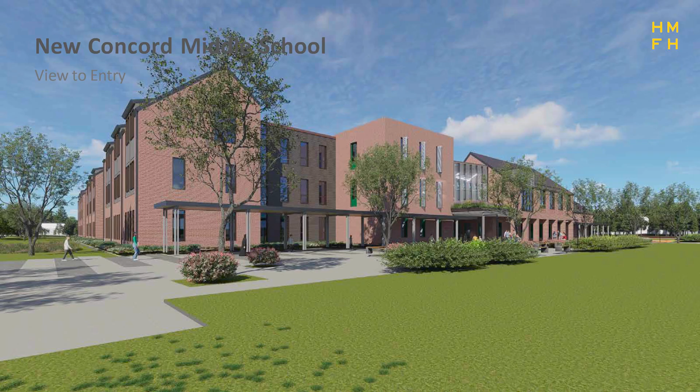This is the agenda for this evening, which I think Tim just went over. This is a view to the entry of the new school. The new school is going to be built to the west of the existing school, basically on the location of...

The existing athletic fields. The building is being designed to be net zero, which means it's going to produce as much energy as it uses. It has solar panels on the roof and geothermal well fields on the back side of the building.

The building is predominantly 2 stories. There is a 3-story wing, which is the academic wing, which faces south.

This is a view from the new athletic fields, looking back towards the entry of the school. The academic portions are on the left. There are some administrative offices and student support spaces in the middle. You can see the glassy piece in the middle is the entrance.

There's one main entrance for the school, so students arriving in a car or in a bus all will come to this one single point of entry. And the media center you can see is on the right side.

This is a view from the north side of the site, looking into the cafeteria courtyard. On the left side are music spaces and the theater, and on the right side is art classrooms and the gymnasium. You can also see in the foreground, this is the media center as well.

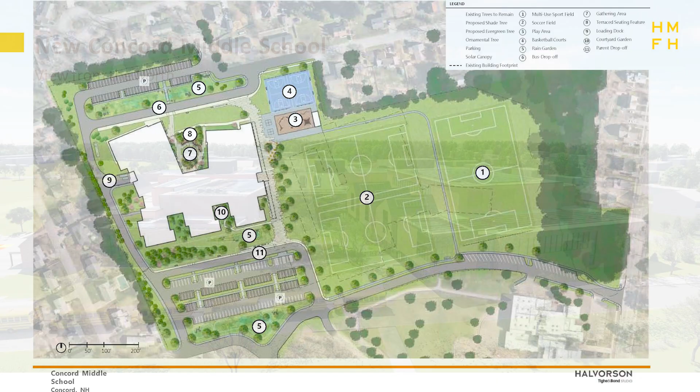This is a site plan. You can see dashed in the middle, there is... can you see my cursor moving? Number 2 in the middle of the site, that is the footprint of the existing school. So the new school is being built to the west.

The existing driveway that separates Abbott Downing from Rundlett School remains roughly in the same location. That is the parent drop-off, and the main parking lot is accessed from that parent drop-off. Students get dropped off at number 11 and proceed to the entry, which is sort of in the middle of the building on the east side.

There's a secondary parking lot to the north, which is primarily for faculty. And item number 6 is the bus drop-off. There is a service road around the west side of the building that will be gated to prohibit access, and the gate will only be open for deliveries or emergencies.

We have a short animation. This is coming up the entry drive looking towards the entrance of the school. In the foreground here, you'll see the parking area. There is potentially some solar parking canopies.

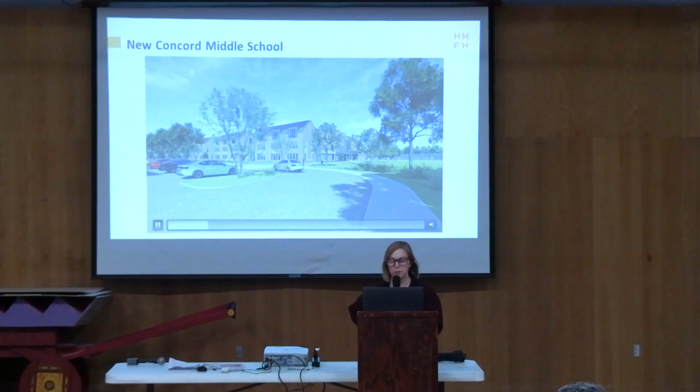What you're seeing there to the left, those are the 3 academic wings that are 3 stories. So that's the 3-story part of the building. Now we're swinging around towards the entrance. There's a covered walkway that brings you to the one single entrance. What you see on the left there are kind of student support spaces, counselors' offices, nurses' suites.

Sorry, this is glitching a little bit. We're swinging around and looking at the main entry, which is the glassy piece in the center with the canopy above it, and then to the right is the media center. And on the far right is the band room.

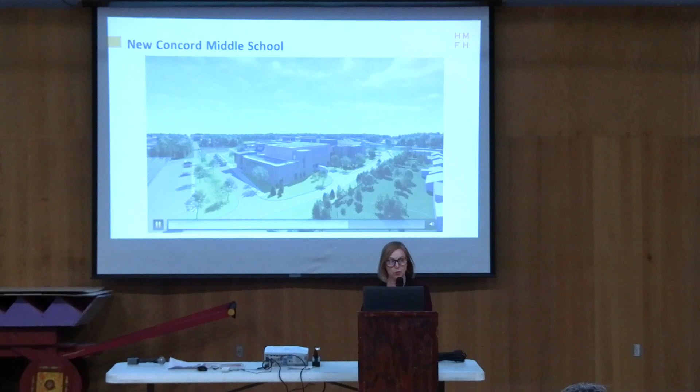Now we're swinging around to the north. It's a little slow here. To the north, there is a courtyard outside of the cafeteria. Music spaces are to the left, arts to the right. And then the gymnasium is on the 2nd floor above the loading dock.

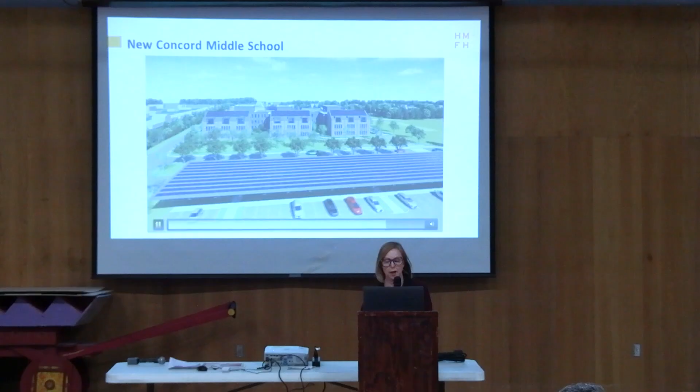This is the service drive and the loading area. Now we're swinging back to the 3 academic blocks. The building is predominantly brick with a metal roof, and we do have some accents with brick patterning and a couple different colors of brick to give it a little life.

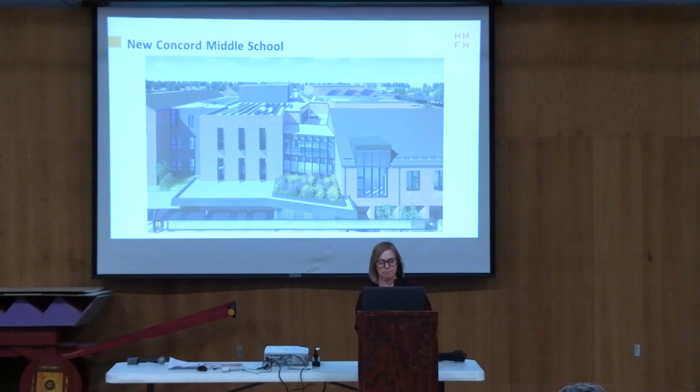Now we're dropping it back down to the main entrance. And that's all I have. I'm going to hand it over to Harvey Construction to talk about construction traffic and schedule.

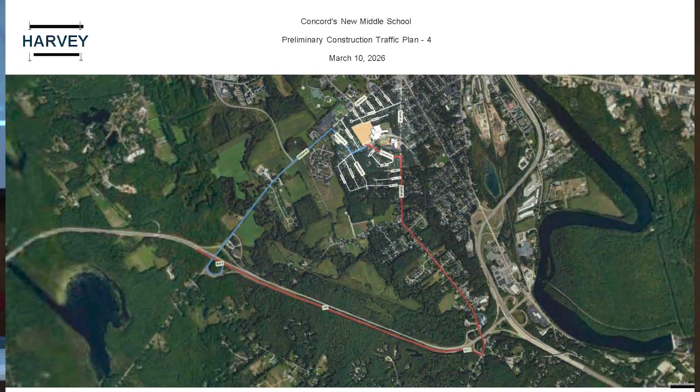I don't have any fancy movies or anything, they're really just simple graphics. What we're going to talk about is the anticipated construction schedule, short-term and long-term, and then traffic patterns while we're under construction. On your handouts, you saw some milestone dates relative to construction.

The first 4 dates represent references to mobilization. April 27th is the target right now. That means we'll be on site. That doesn't mean that's when the bulldozers show up, but it means we're present here, putting up construction fence and preparing the property.

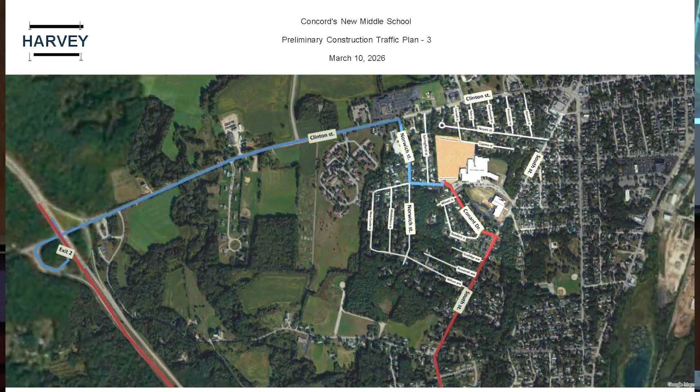There are some activities such as ground improvements, if you've been following this project. The soils need to be improved. You do that by ramming aggregate stone into the ground to make it better. That is going to take upwards of 12 weeks, and that's part of the initial process here over the summer.

Then in earnest, by the fall, we're going to start seeing heavy machinery relative to the construction. The new building is going to go until November of '28, just over 2 years, at which point the school would open and we would then come over here to take this building down to build the fields.

Then we would build the fields through '29, and since they're grass and not synthetic, they need a year of growth, mowing, and maintenance before they can be played on. So that puts you up to about 2030 for them to be available. The other dates on the bottom are activity date driven, so they have a start and a stop, and they tie up to the 4 dates I just read off to you.

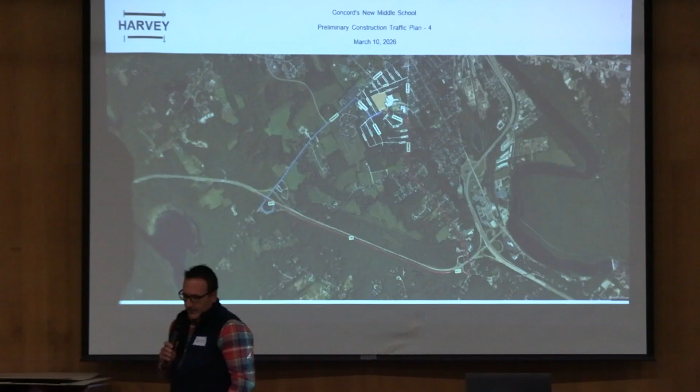We looked at traffic patterns, in particular the tight roads in the neighborhood, and chose 2 different routes to come in. This gives you a good view of 93 and 89 and exit 1 and exit 2, which would mostly be utilized. Here's exit 1, here's exit 2, Clinton Street, coming in along those major thoroughfares to get to either Conant off of South or Norwich off of Clinton.

That would bring us into the construction site, where the construction entrance is actually going to be just over here to the right, at the base of the fields along the entrance drive. Zooming in at exit 2, you can see Clinton Street a little clearer, coming down Clinton, down to Norwich into Conant, and you can see where the blue and red lines emerge.

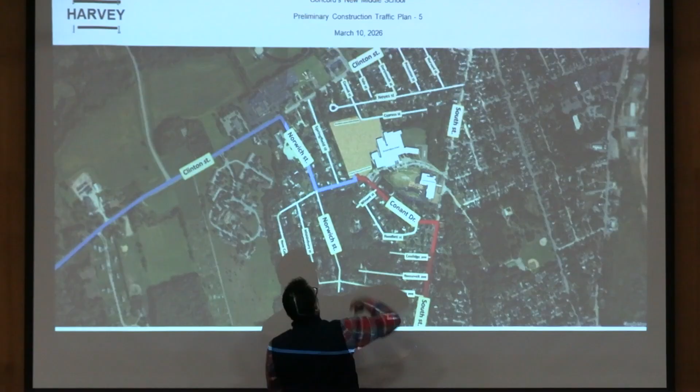This is showing exit 1, and now there's a little blow up of the area. So we are sitting essentially right there, and the entrance is going to be just off here to the right, off of Conant.

This is not going to be all day, every day. This is really major traffic relative to deliveries. Construction workers obviously take smaller vehicles, and they'll be finding their way, with most if not all of that parking happening within the confines of the construction site, so we won't have street parking associated with worker parking. This is really a truck route, delivery route, for large vehicles to support the construction process.

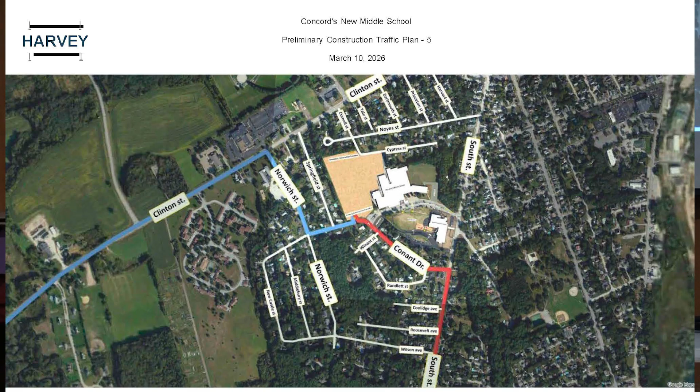We're going to have questions later, I'm sure, but this is now going to move into the design portion, the build conditions. So this was the construction portion, the sequencing, and next is about traffic relative to the build condition, which is with GPI.

All right, good evening everyone. You weren't kidding, that is sensitive. My name is Rebecca Brown. I'm here from GPI, the traffic consultants on the project.

I want to walk you through a little bit of the existing and proposed circulation that will happen with parent traffic and bus traffic coming through the school site, and talk about some of the improvements that will occur in order to make those traffic patterns work. Then we're going to open it up to hear some of your questions and comments.

For anyone who has been out here, as part of the neighborhood and as abutters, the majority of you are already aware of the existing traffic patterns. But if you see on the figure behind me, the blue arrows traveling through the site today represent where the existing parents travel through the site.

Right now, it's a bit of a free-for-all in the morning. Parents come in through the main driveway from South Street, and they also come in through the Abbott Downing driveway. They'll pull up really anywhere they can, stop in the middle of the roadway to let their kid hop out, and then go back out onto Conant Drive.

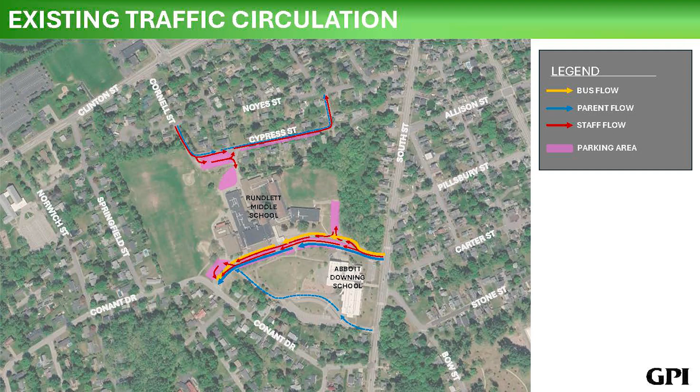Into the school property through South Street and then coming back out onto Conant Drive to exit. The buses do also enter into that same driveway from South Street, and there is a median that runs down the middle of the driveway that separates the bus traffic from the parent traffic. The staff, unfortunately, have to mix in with both the bus traffic and the parent traffic right now. So in the future, one of the main goals was to try and separate all of this traffic to make it flow a little bit better so that staff trying to get into school in the morning aren't getting mixed in with the parent traffic. The buses can operate efficiently, also not getting mixed in with the parent traffic.

So in the future with the proposed school, both the staff and the parent traffic will enter through the main driveway from South Street. But the parents will go from there into their own separate parent drop-off loop, right in front of the school, where they will drop off their student and then be able to pull out into a separate driveway onto Conant Drive.

Whoops. Not sure what happened, but the screen just went black on me.

There we go. The bus traffic, on the other hand, will come in through Noyes Street onto Cornell Street and loop in through their own separate drop-off area in the back of the school, and then come back out onto Cypress Street through Noyes Street to get back to South Street.

Now, one of the reasons this circulation pattern was chosen, and I know there's been some concerns about that being a lot of bus traffic in the neighborhood, can we flip that around? But with the school being located so far back from South Street, this option really allows us to maximize the distance between the school and South Street for that parent traffic to queue up. And it keeps all that parent traffic out of the neighborhood where there's less control of which roads the parents will take.

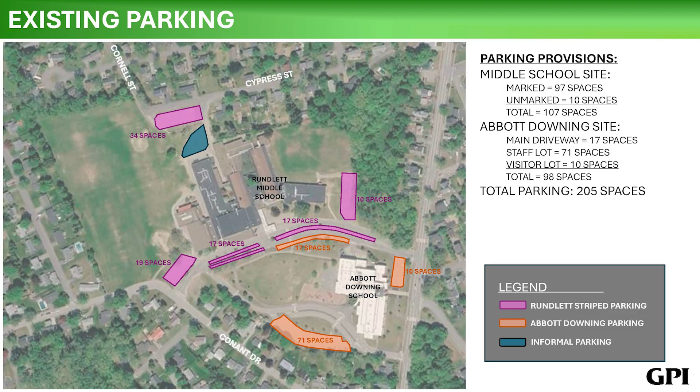So just to quickly cover the parking that is proposed, as you can see from this graphic, there's kind of parking all over the place right now with the existing layout of the school. It runs along both sides of the driveway, so if vehicles are parked in there in the afternoon when people are getting out of school, they're really trapped in there behind the queued traffic until that clears out after school. In the future, there will be two separate parking areas.

One will be located on the north side of the building and have 60 parking spaces dedicated to staff only, so there won't be visitors coming and going through the neighborhood throughout the day. That parking will be dedicated to staff and assigned to specific staff. There will also be a large parking lot on the south side of the building, on the inside of that parent drop-off loop, where visitor parking and additional staff parking will occur, so that visitors coming to the school are coming in through that main driveway where there will be signage directing them on where to go, and it won't put that traffic into the neighborhood.

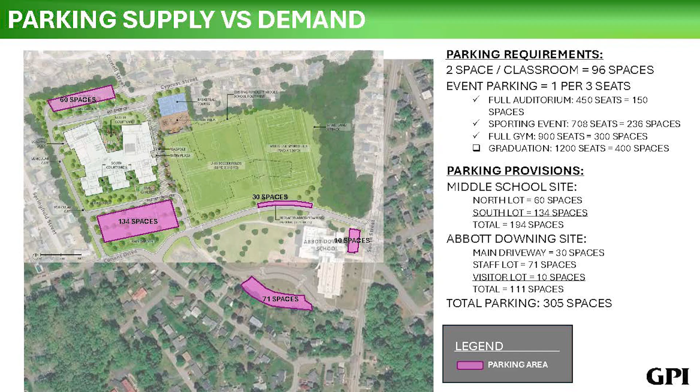Right now there are 19 buses that all queue up in that main drive aisle. There is just barely enough for all 19 of those buses to fit in that area. Once that 19th bus pulls in, they start blocking parents from being able to get into the parent queue. Parents will park double stacked all along the driveway where there's parking already located on both sides. It becomes a stocked area where they're all waiting for students to come out of the school. Because of that double stacking, rather than having a rolling pickup situation, if a certain student takes a little bit longer to get out to the car, everyone behind them is waiting in that line until that student finally gets in their car and that parent can pull away.

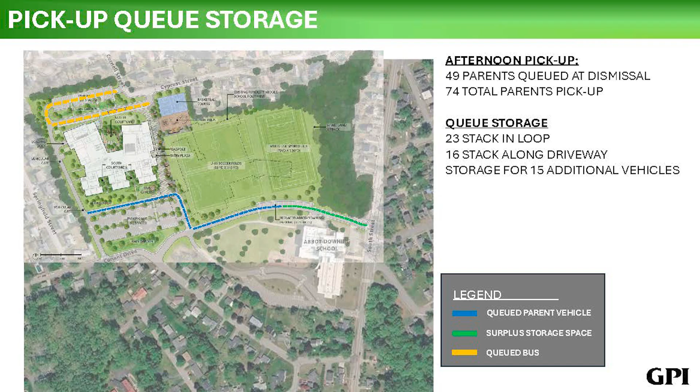With this, it really doesn't matter what time a parent gets to the school. It takes away that encouragement for people to be the first car in line so they can get out of there quickly, because they'll have the opportunity to bypass the line rather than sitting there waiting.

So we are proposing to upgrade those school zones with new school zone flasher assemblies that will light up with the speed the driver is going. Once a driver starts going 5 miles an hour or over the speed limit, it will just say slow down.

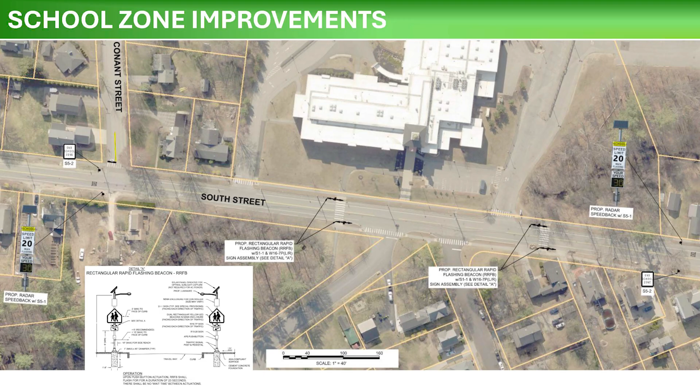We're also proposing to install rectangular rapid flashing beacons at the 2 main crosswalks on South Street on either side of the site driveway. Once a pedestrian walks up, they press a button, it starts flashing a signal back and forth to alert drivers that there is a pedestrian waiting to cross. That also helps to facilitate crossing guards, so a crossing guard can activate that button before they step out into the roadway with their placard, as an added benefit and safety measure for those crossing guards as well.

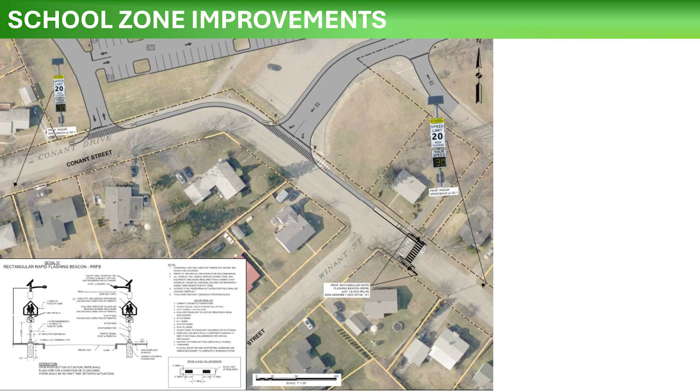This is showing similar improvements over on Conant Drive, where we've proposed radar school zone feedback signs, and upgrading the existing crosswalk located just east of Winant Street, since there are currently no curb ramps there. We're adding curb ramps to make it ADA accessible, and installing RRFBs to alert drivers that there are pedestrians crossing the roadway.

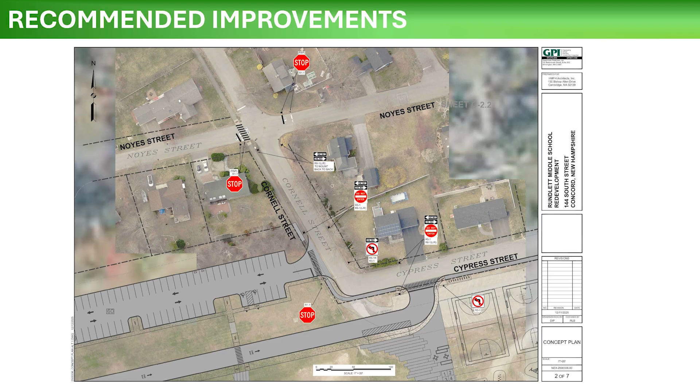There are also some minor recommendations over on Cornell Street and Cypress Street, mainly signage related, to reinforce the one-way pattern there. Currently both streets are one-way, circulating in a counterclockwise pattern, but there's limited signage to direct people. So we're proposing new do-not-enter and one-way signage to help direct people, particularly as they're coming out of the school driveways, so they know which way they're supposed to go.

So those are really the improvements being proposed and the circulation patterns being proposed. I think we're going to start going to questions now.

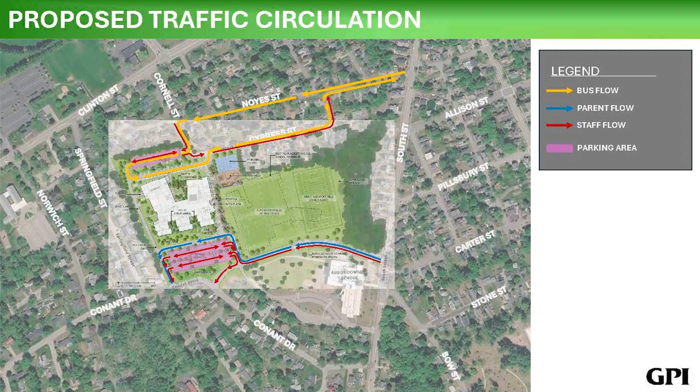The main reason this was proposed as the traffic circulation, as I mentioned, is we did want to separate buses and parent traffic to the maximum extent possible. With that, we've created these two separate loops, one for the parents, one for the buses. The loop at the rear of the building, the north side, isn't large enough to accommodate all of that parent traffic. If we were to put parents back there, parents would be backed up basically down Noyes Street, the length of this first arrow you see on Noyes Street, a little bit back past Yale Street.

There have been several comments brought up that the buses are going to block traffic. The buses can all be entirely accommodated on the site itself. All 19 buses can fit on the site within that loop and wouldn't need to back up onto the street. So one piece of it is just that the buses can fit on the site compared to the parent traffic.

Another piece of it is the type of drivers we're talking about. Bus drivers are highly trained, they have designated routes, they are monitored, so they are not going to be speeding through the neighborhood compared to if we were to put parent traffic back there. Many people coming to the school could be unfamiliar with the routes coming through that way. You tend to get people coming from all different directions because they don't have a designated route they have to follow. So you could potentially get a lot of cut-through traffic through those neighborhoods if we were to swap the two routes.

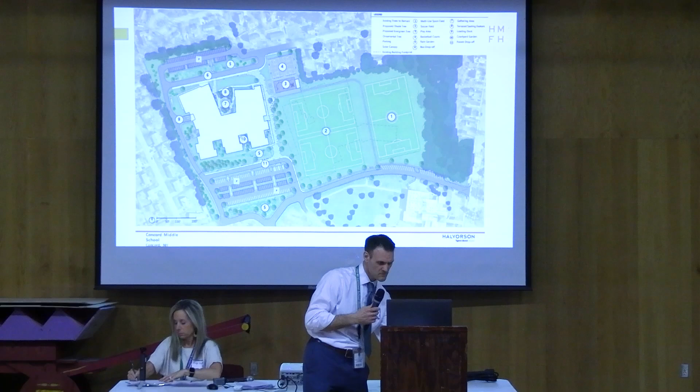Can you also point to number 9, where they have the service entrance? Just thinking in a kind of round trip mode, so you're not going on Cypress twice, because I was driving there yesterday and one car was stopped on the side of the road, and that prohibited anybody else from getting by without one person waiting, the other going, and then the other going. So I don't know how that happened, or even someone mentioned the trash trucks and a bus getting by, and that sort of thing.

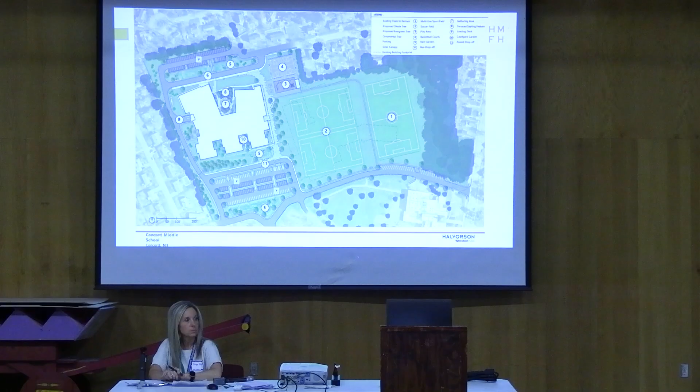What would be the possibility of continuing west, so you're headed towards Springfield, and then there's that side road that would be going from north to south back towards Conant, the access road, and just have folks drop off at that spot designated number 6, continue to the left, come down the access road, and come out on Conant Drive. Then the buses can come and go from there, and you're not having crossing traffic of the buses coming out of Cypress and Noise, or all the problems potential of coming up Noise and trying to get out on Center Street. Just a thought, thank you.

Others before I give Mr. Smith back the microphone? I'm giving Mr. Smith. Yeah, all right, let's get clear.

I heard a couple times tonight that there may be some sidewalks. Most of those streets you're talking about, if they're going to take sidewalks, they're taking your land and my land. There's not public space there to make sidewalks unless they take our property, which I think they can probably do because they can probably go in 15 feet. But they're not going to change the tax rate—you're still going to get taxed for that whole piece of land. So be careful about taking that. Second thing, I've heard the woman in the dark right in front of me here say three times, twice here and once in city hall, that... oh God, no, I forgot what I was going to say. This is what you get.